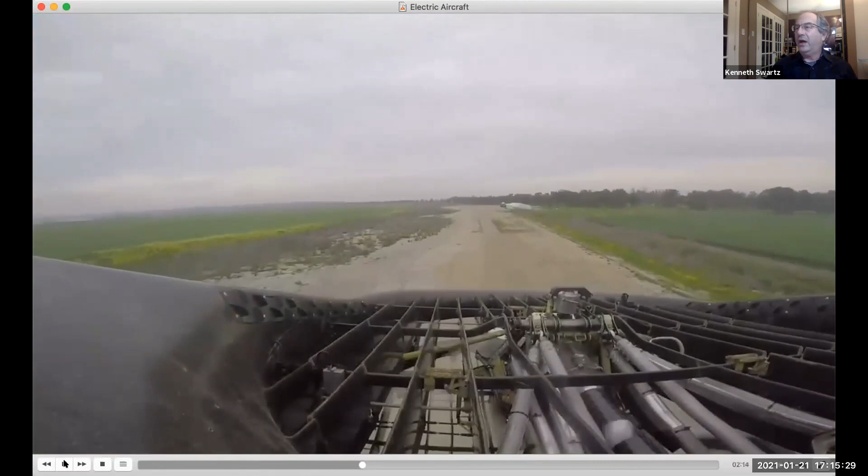Urban Aeronautics is an Israeli company. This aircraft has been flying for a number of years with an Arriel turbine engine, but they're moving to a hydrogen electric fuel cell system. It's an internally ducted aircraft.

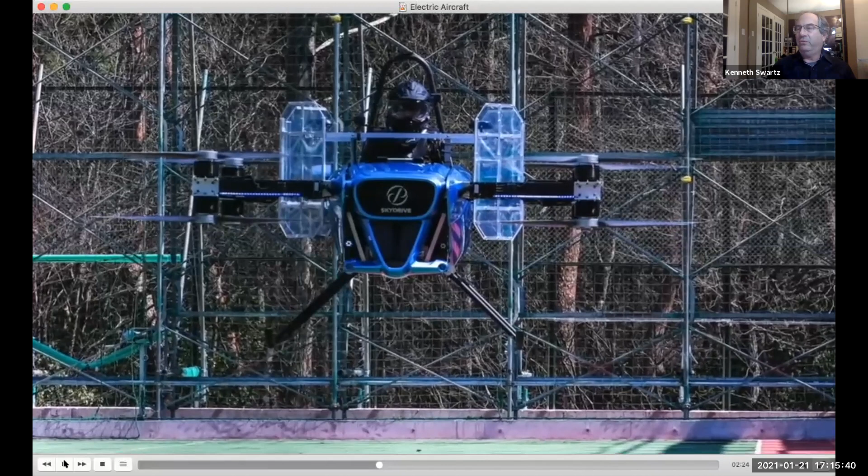SkyDrive developed this aircraft to light the Olympic torch in 2020. They will be using it in 2021. It's a multi-copter design.

Dragonair was a participant in the Go Fly prize. The $1 million prize is still standing.

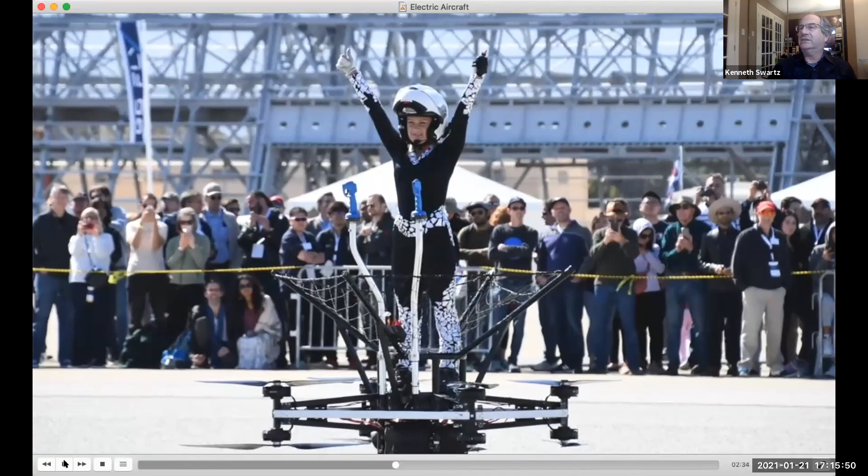Joby Aero is considered the most advanced of the eVTOL developers. This is their 2.0 aircraft, currently flying at a military base in California.

In 2009, the Green Flight Challenge was announced and sponsored by Google. The Pipistrel aircraft here won the $1.3 million prize for efficiency.

NASA has been active looking at distributed electric propulsion. The X-57 Maxwell will have a number of different wing configurations. It's currently being developed and has not yet made its first flight.

Ampaire is developing a retrofit of the Cessna 337, cutting operating costs in half by using a hybrid electric engine - an electric engine on one side, conventional engine on the other side.

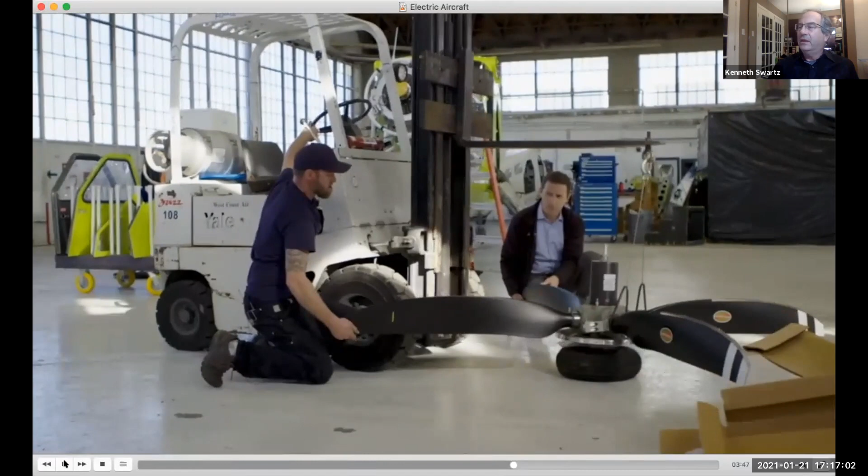magniX is originally an Australian company, now based in the Seattle area. They have a number of projects for their electric engines. One of them is a retrofit of a Harbour Air Beaver, replacing the piston engine with a 750 horsepower electric engine. This is at Vancouver Airport.

Bye Aerospace is developing a 2-seat and 4-seat aircraft. The 2-seater is a trainer. Their goal is to dramatically cut the operating costs of flight training by reducing both the maintenance and energy costs required to train per hour.

magniX and AeroTEC in Moses Lake, Washington have teamed up. Earlier in 2020, they test flew an electric powered Grand Caravan at Moses Lake. This is an STC certification program in the same way as the Beaver.

We're replacing conventional piston or turbine engines with an electric motor. The main benefits are reduced operating costs. You may lose a bit in terms of payload, but as battery chemistry improves, you'll be able to gain back that payload.

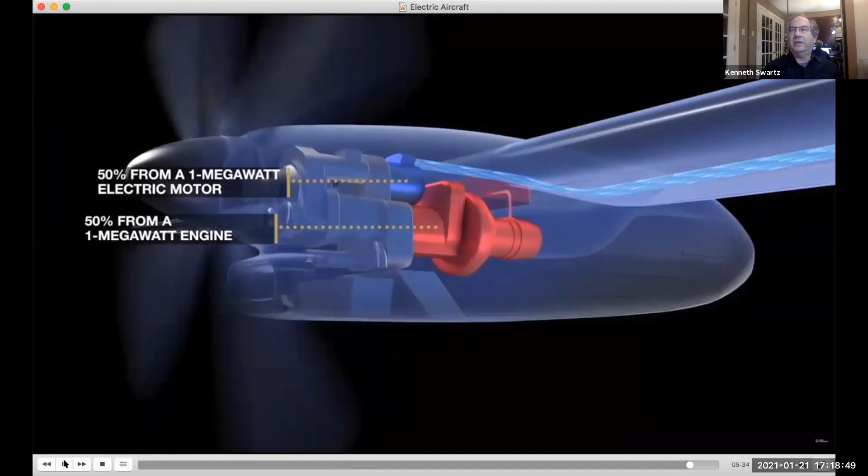The Raytheon Technologies, formerly Collins, formerly Pratt & Whitney, Project 804 was taking place at Mirabel. It's a hybrid electric conversion of a Dash 8-100.

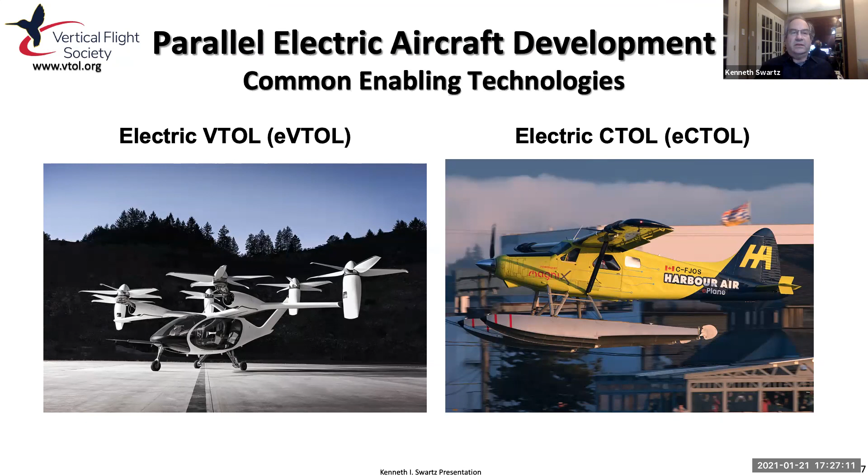So electric VTOL, why now? For many people, including myself, who've worked in the traditional aviation industry, I wasn't even aware that electric VTOL was in development until it suddenly burst on the scene. Part of it is because a lot of the activity was driven by people who were outside the traditional big OEM environment.

Coming from adjacent industries such as drones, automotive, etc. So we have advances in electric motors, advances in batteries, advances in flight controls, advances in computer modeling and simulation, and being able to do that at lower cost. We have composites, we have low-cost manufacturing, we have a movement towards performance-based regulations. So the regulatory environment is also changing, led by, for example, the rewrite of Part 23 in the US to make it easier for aircraft OEMs to develop aircraft and also to reduce the cost of certification by moving to performance-based regulations. We have other technological innovations, and then we have industry-wide disruptions, both in aerospace and automotive, that are spilling over. For example, SpaceX entering the commercial launch business, or Tesla entering the automotive business, which has served as an inspiration to tech entrepreneurs that other branches of aerospace are also accessible.

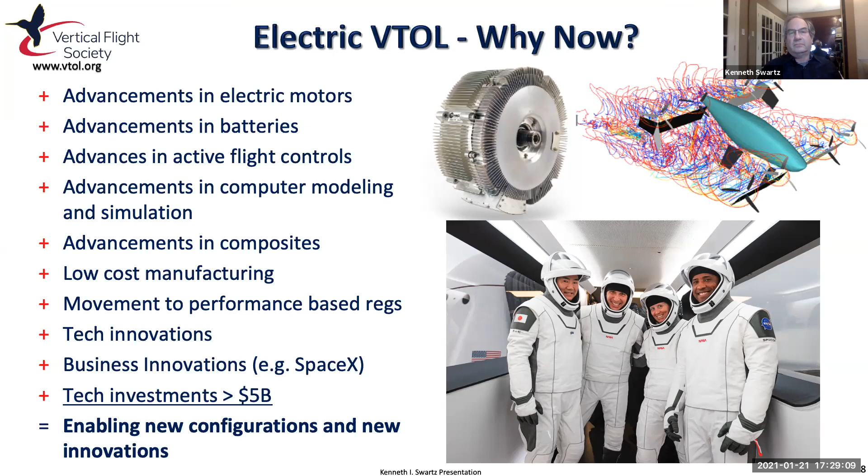You still had the powertrain, the rotor system, tail rotor system that had been developed for a reciprocating engine. So the question was, is helicopters the way to go, or is there something else that can take place?

If you look at distributed electric propulsion, where you replace a single complex system with multiple thrusters, it opens up the design space. It also makes it possible to start looking at compound VTOL aircraft designs that include both a vertical flight capability, but also the ability to fly on a wing.

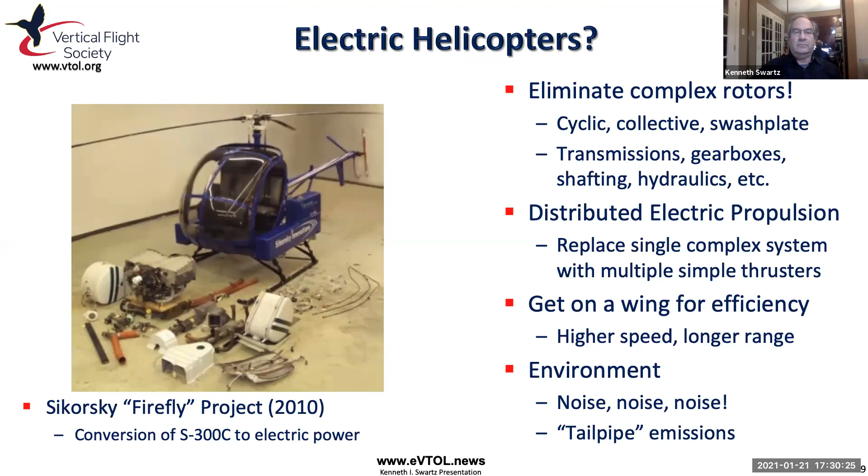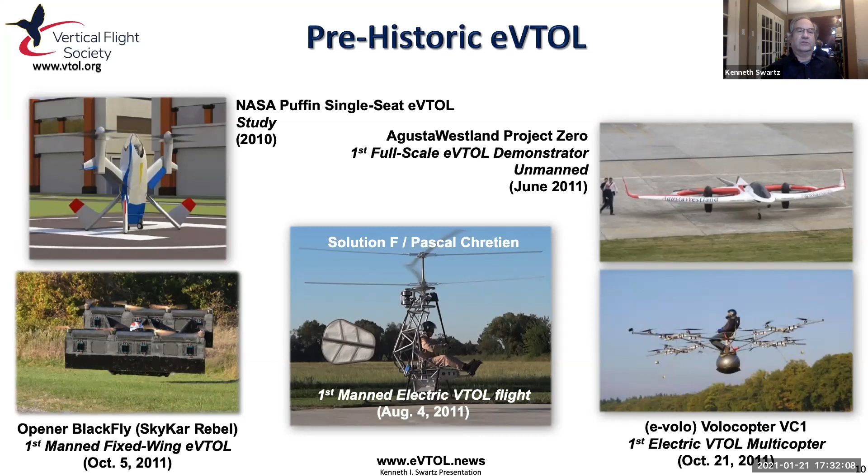So from obscurity, what we've seen take place over the last, I'd say, 3 years, is we've seen a hype cycle where suddenly there's been a lot of excitement about electric aviation and especially electric air taxis. Some people use the term flying car, but that's frowned upon because very few of these aircraft are in fact roadable, intended to be on the road.

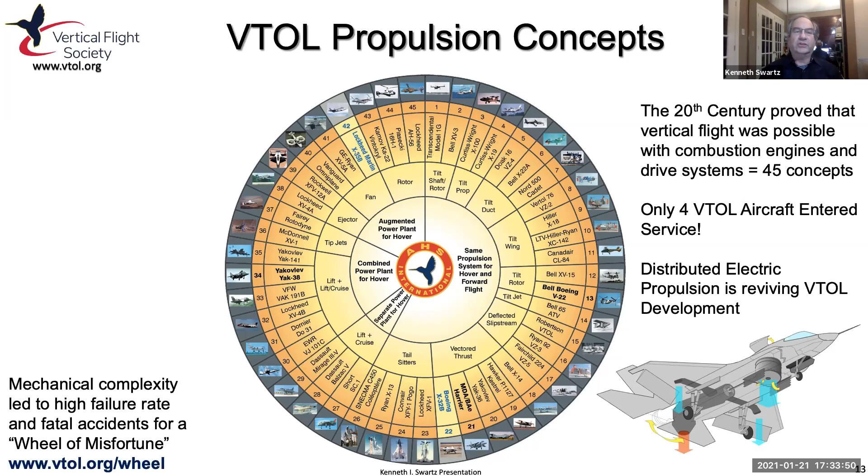One of the aircraft that was part of that VTOL initiative was the Canadair CL-84 tilt wing, developed at Cartierville north of Montreal. 3 aircraft were built and flown. It never entered production. One of the challenges was the aircraft had a complex mechanical control system, not a fly-by-wire system. And there was also cross-shafting between the 2 engines to ensure that if one engine failed, the rotors on the other would still be powered. So it was both heavy and complex, which worked against the adaptation of these kinds of designs.

As we move into the current era, that chart has been redrawn and applied to a number of the different eVTOL concepts that we see flying today, which again can be broken down and differentiated by propulsion concepts.

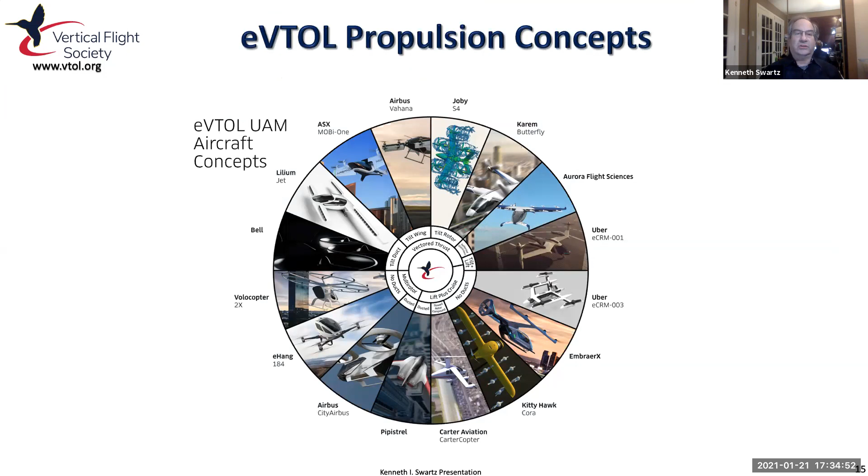Today, if we're talking electric VTOL, there's really 5 basic categories. There's vectored thrust, where the same thrusters, whether it be a duct, a rotor, or propeller, are used for lift and cruise. This would include tilt rotors and tilt wings. There's lift plus cruise, where there's independent thrusters — one set is used to take off and land, and the other set is used for forward flight.

We have wingless designs. Those are multicopters, where 100% of the lift is provided by the rotors or the thrusters. We have smaller devices, which we call hover bikes or personal flying devices. This is either akin to a motorcycle or a recreational vehicle, a single person device, often with an element of excitement and thrill. And then we have electric rotorcraft, where the aircraft have a rotor. They could, if power is lost, auto-rotate. This includes both electric helicopters and electric autogyros.

In April 2017, we decided to take the information that Vertical Flight Society knew about the electric industry and create a specialized website called evtol.news. We put up all the information that appeared in the magazines, and at that point we could only identify about 17 eVTOL aircraft programs.

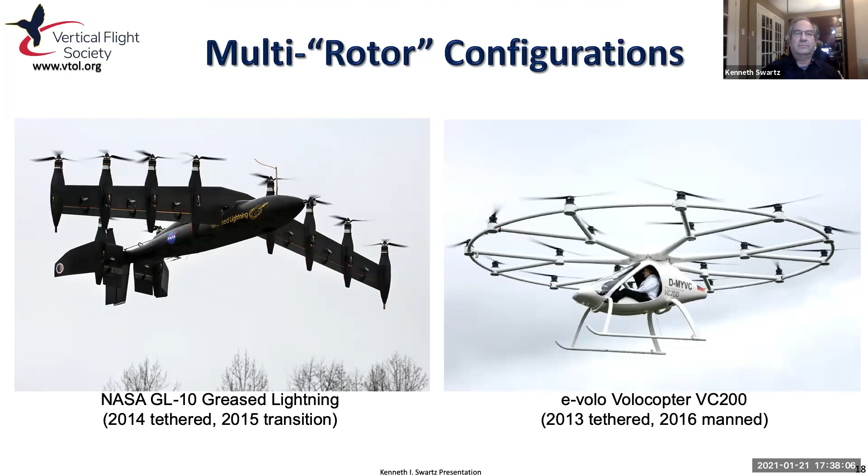As interest developed in these aircraft, so too did the question: how can we put these aircraft to work? What are they good for? How can they be used?

What we see is a progression from the light end of the marketplace up into urban air mobility and regional air mobility. The interesting thing about this sector is that very few people are proposing anything that can carry more than 6 passengers, and there's a couple reasons for that. One is limitations related to battery chemistry and energy density of cells currently available.

The other consideration is that aircraft noise typically scales with takeoff weight. If you're trying to develop an ecologically friendly aircraft, the feeling is it's lower risk and lower cost to develop from the bottom end and work your way up. But there are no eVTOLs proposed with maybe more than 6 or 7 seat capacity, and the majority are in the 4 to 5 seat capacity.

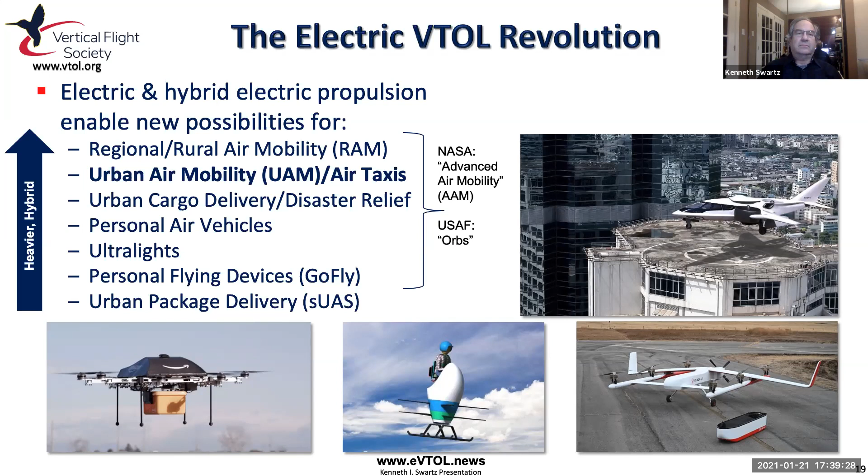eVTOL ultralights are one of the first categories of aircraft that caught popular attention.

In the last 3 years, we had Kitty Hawk come out of stealth mode, we had Opener come out of stealth mode, Lift, Hover Surf. The US rules under Part 103 ultralight category: if the aircraft is under 254 pounds, it does not have to be certified or registered, and you do not have to hold a pilot's license. It falls in the same category as a paragliding device or even an ultralight trike.

The FAA also grants an allowance of 30 pounds per float for amphibious, waterborne aircraft, plus it grants an exemption for parachutes. So you can exceed that 254 pound limit.

Opener and Kitty Hawk both made over 20,000 flights with their aircraft. Kitty Hawk shut down their Flyer program earlier this year, but Opener and Lift particularly are continuing their aircraft development.

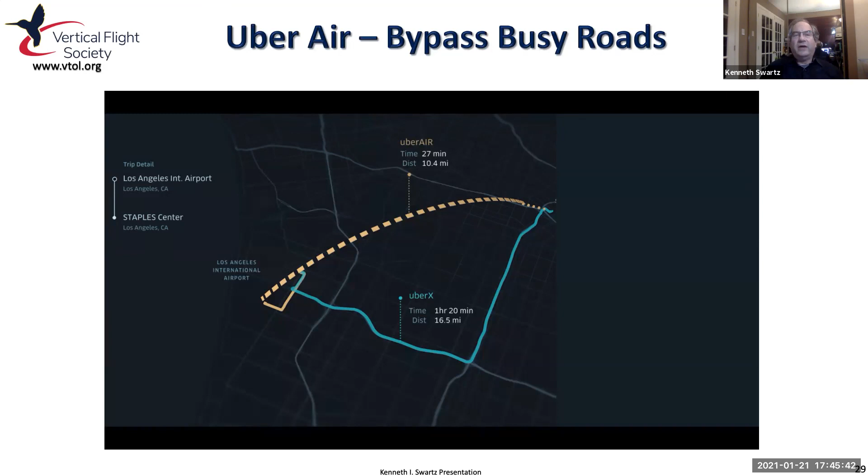What they had was the big data of urban traffic flows, time of day, day of week, seasonality, and they could also correlate that with income. With that data, they could understand, through big data analysis, what the traffic flows were for all the cities in which they had a market presence. Because these aircraft would only carry 4 passengers, like a typical taxi or shared vehicle, and have a single pilot, in order to scale this you would also have to scale the ground infrastructure.

Uber spoke of skyports or vertiports designed for high capacity operations, as well as transferring passengers from the rooftop to the ground to an Uber vehicle. The concept was to identify nodes within an urban environment that would be the ideal connecting points between ground and air, or even on foot. This unleashed a lot of creativity among architects around the world in terms of what these vertiports might look like.

From Uber's perspective, they argued very strongly that an eVTOL aircraft must have wings. They were looking at two things: the battery power required to cruise, and the battery power required to hover. If you can achieve wing-borne flight, you can reduce the amount of energy required, especially important if you only have finite energy. The second element is that wing-borne flight lets you fly faster than a helicopter, achieve higher productivity, generate more available seat miles per year, and have a distinct advantage over a helicopter, ultimately driving the cost of operations down so it's not such a big step to move from an Uber Black into an eVTOL.

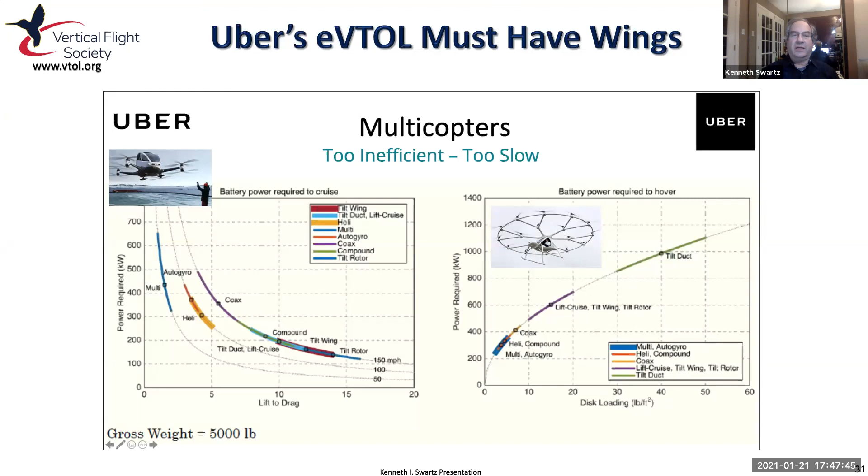So what they were trying to achieve was seat mile costs close to that of a ground taxi. They also looked at the technical aspects of disc loading and power loading, and they lined up 10 partners, 8 of which were announced, companies that would be developing aircraft for their ecosystem.

In the meantime, there were other companies developing their own aircraft. Kitty Hawk grew out of Zee.Aero, a California company.

The Cora project that Kitty Hawk was developing was spun off into Wisk, which is a joint venture between Kitty Hawk and Boeing. This is a 2-seat eVTOL aircraft that is currently being flight tested in New Zealand and California.

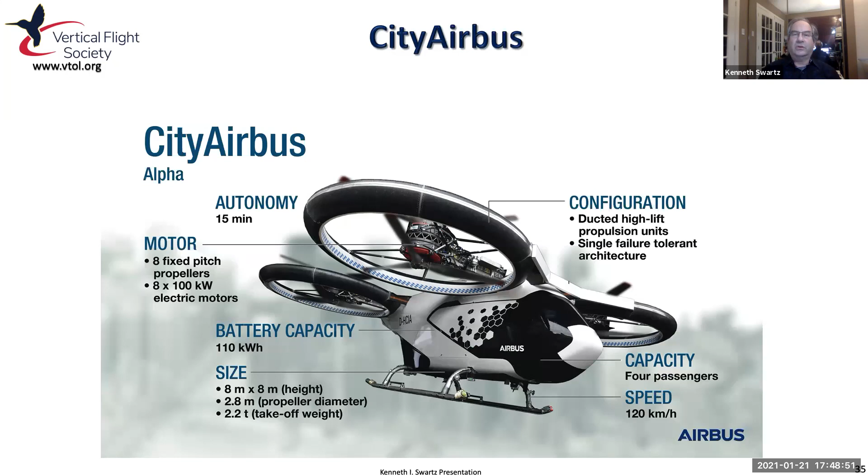City Airbus is a project of Airbus Helicopters that complemented the Vahana project being undertaken in the States. This aircraft is being flown in Germany, and it has 8 fixed pitch propellers, and it's also a technology demonstrator to learn from.

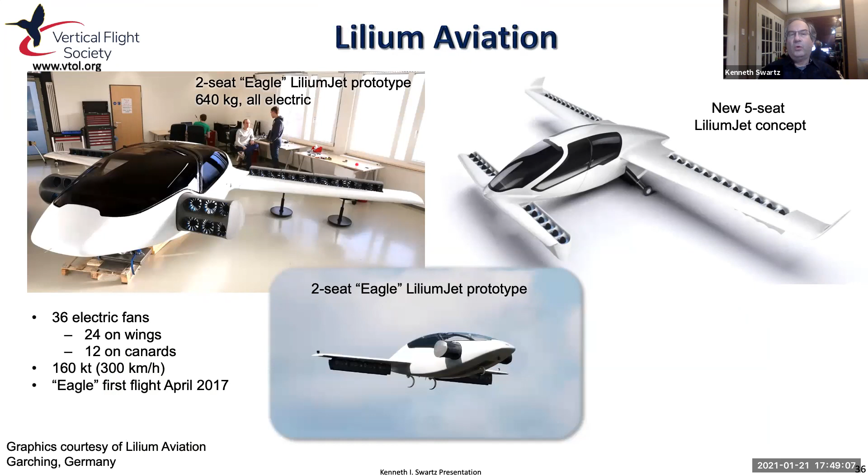Lilium is another German program. They use small ducted fans, 36 on the aircraft, and the concept is a longer range, higher speed aircraft. Recently, they announced that they were going to set up a commuter operation in Florida.

EHang in China has actually started producing their aircraft. They seem to be operating within an exemption to traditional aircraft certification, but they are developing this aircraft in China. They have Western investors, including United Therapeutics, and they've done demo flights of this aircraft in many parts of the world, including Quebec

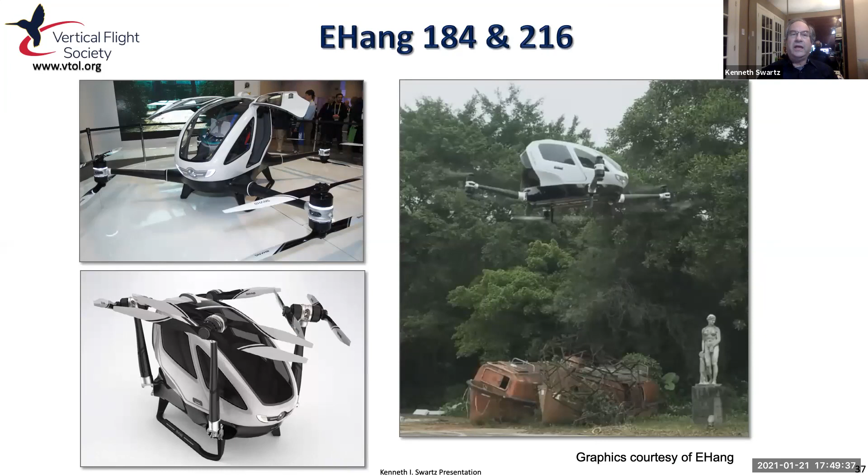and Bromont. In January 2020, there were a number of unveilings. CES, the show in Las Vegas, became more of a hub for this activity than the traditional aviation shows. Bell unveiled a 4-ducted Nexus for the Uber program that would be all battery electric, to complement a hybrid electric aircraft they unveiled in a previous year.

Joby Aviation, after 5 years of being in stealth mode, unveiled their eVTOL aircraft, what was originally known as the S4, and now they call the 2.0, which is a 6-rotor tilt rotor with 5 seats. They announced this program in conjunction with new investments, including $400 million from Toyota, bringing their investments to over $720 million and placing the valuation of the company at over $1 billion. And Hyundai announced a $1.5 billion commitment to develop eVTOL aircraft.

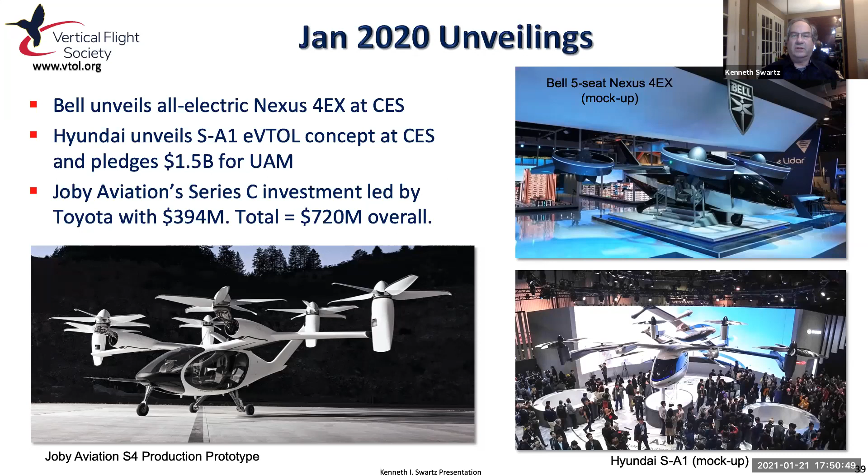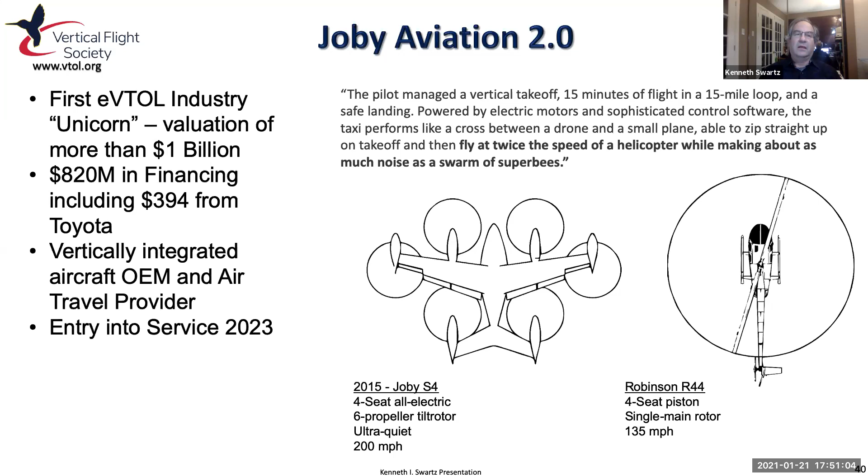Joby last gave a technical presentation in 2015 at a VFS event, when they revealed the concept of the S4. Nothing was heard or revealed about this aircraft for a period of 5 years. Recent patent filings reveal a lot, and here's the aircraft in its various modes.

Over in Germany, we've had Volocopter partner with both transportation organizations, but also first aid organizations such as the German Automobile Club that runs air ambulance programs, and they're doing a demo program. They've released a white paper on eVTOL aircraft in emergency response.

United Therapeutics is a company founded by Martine Rothblatt, founder of Sirius Satellite Radio, a billionaire, looking at funding a number of different eVTOL programs to support the transportation of human organs for transplant that have a very limited shelf life. They're funding a number of different electric helicopter and eVTOL aircraft programs, including EHang,

Beta Technologies in Burlington, Vermont, Tier 1 Engineering in California with the Robinson, and I believe Piasecki Aerospace in Philadelphia.

Jaunt Air Mobility is another concept. They bought the license to the Carter Copter slowed rotor system. This is a heavily weighted rotor on really a gyrodyne design, where as it increases cruise speed, it achieves primarily wing-borne lift, and the rotor is slowed to reduce drag.

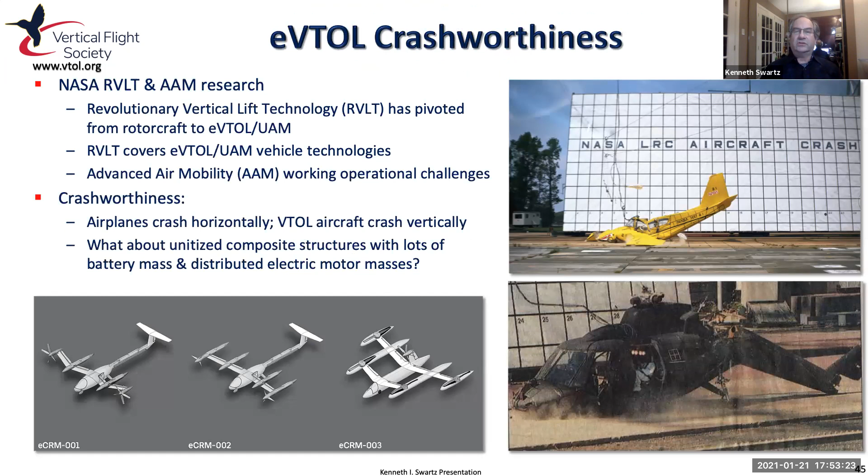Similarly, Airbus is looking at an electric system to provide emergency power in the event of an engine failure, where a battery would allow the aircraft to safely auto-rotate.

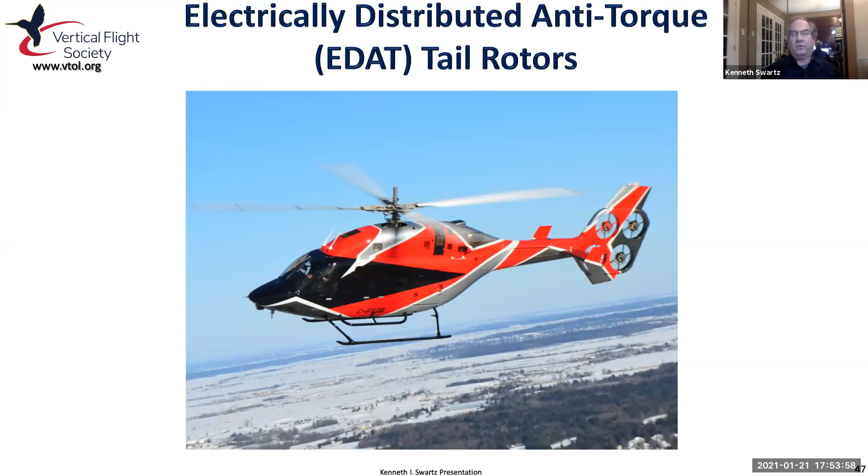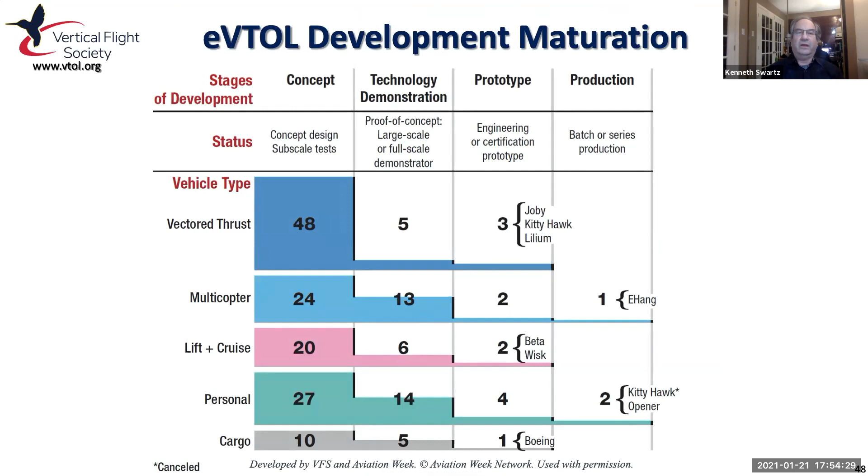The latest development is that Uber has pivoted away from eVTOL development as a champion. This reflects the impact of COVID-19 this last year, where their food delivery services are actually much greater than their ride-sharing revenues.

And we're probably all guilty of contributing to that if we've been self-isolating and ordering takeout, to the point where their mobility revenue is 53% of what it was year over year, while the delivery revenue increased by 125%. As a consequence, Uber has been selling its...

longer lead time technology projects. Their self-driving car unit was sold, and they invested $400 million in the startup. Similarly, last week or two weeks ago, the sale of Uber Elevate to Joby closed, and Uber has invested $125 million in Joby, representing 15% of investment. Okay, eVTOL, I realize we're running tight on time.

So what are the challenges? Technology, infrastructure, flying. There was a pilot shortage prior to the coronavirus pandemic. It's expected that these eVTOL aircraft will enter commercial service in 2023, but more likely 2025. We can be in a situation where a lot of people have left the commercial aviation industry, and we'll have a pilot shortage again across all sectors. So the question is, where are these eVTOL pilots to come from, and how can you structure a rewarding career path? Standards and regulations are in development, haven't been completely finalized in the US or Europe, although there's great effort to seek harmonization as well as to use standards to support these things. Public acceptance, noise, and safety are also very front and center.

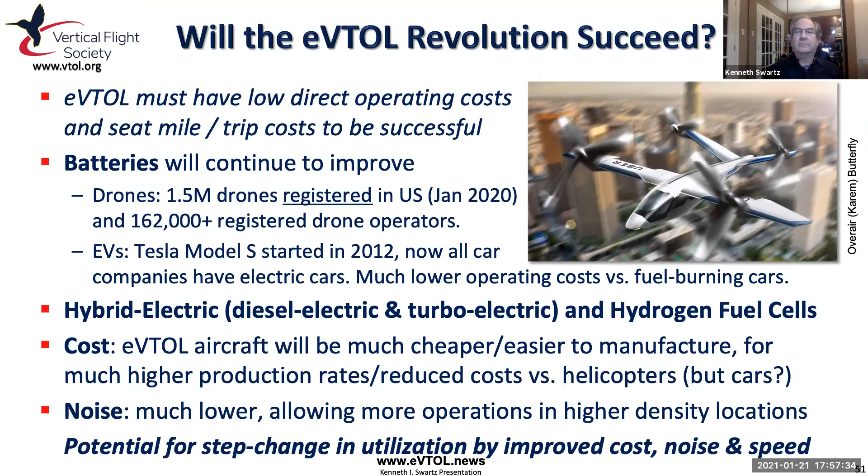The commercial path - really there are three players that have to make money: the manufacturers, the operators, and the service providers, if, for example, it's a contract operator like an Uber. If we look to Canada, Canada is home to the world's most successful scheduled helicopter operator, between Vancouver, Victoria, and Nanaimo. Helijet, which has been flying the route for 34 years, is looking at eVTOL to feed their trunk operations at low cost and low noise, both in Vancouver and Seattle.

Okay, the other thing that's spooled up as Uber's involvement has spooled down is the US Air Force becoming a major investor in the acceleration of this technology. They want to not create separate requirements, but support the commercial development and certification of these aircraft and become a major customer. As a consequence, they have an Air Race to Certification program. Joby is part of it. Beta Technologies in Burlington, Vermont, and Plattsburgh is part of it. And it's moving forward.

Okay, I'm looking at the time and it's, I guess, 5:58. I will continue to speak for a few minutes to rush through the fixed wing section of this program.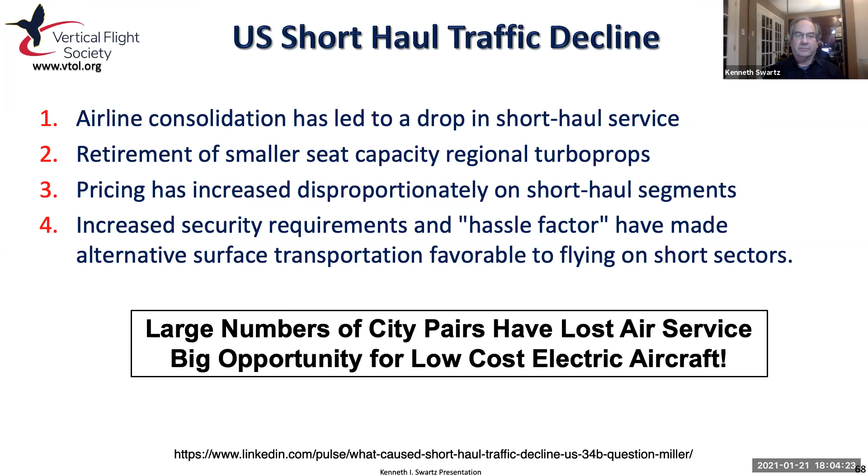So what are the projects that are out there? This is by no means a comprehensive list, but Ampaire is developing the hybrid electric Cessna Skymaster. They replace one of the engines with an electric engine, and the other is an engine plus a generator to power batteries. They effectively reduce fuel costs and maintenance costs in half, and some of their customers are flying small routes, Caribbean and Hawaii, between islands, where that kind of savings is substantial.

MagniX, originally an Australian company, now headquartered in Everett, Washington, is looking at the Cessna Caravan for the same thing—short haul routes where they can significantly reduce the operating costs of the aircraft, operating a PT-6.

Harbour Air has announced a commitment to go all electric. The political climate in British Columbia is supporting zero emissions or low reduction in emissions. Maintenance costs for the Pratt & Whitney R985 are quite high—this is an engine that was designed in the 1920s.

The battery weight may mean that you lose a seat or two relative to the piston variant, but with operating costs less, you could still make money, and then gain back the payload as battery efficiency improves.

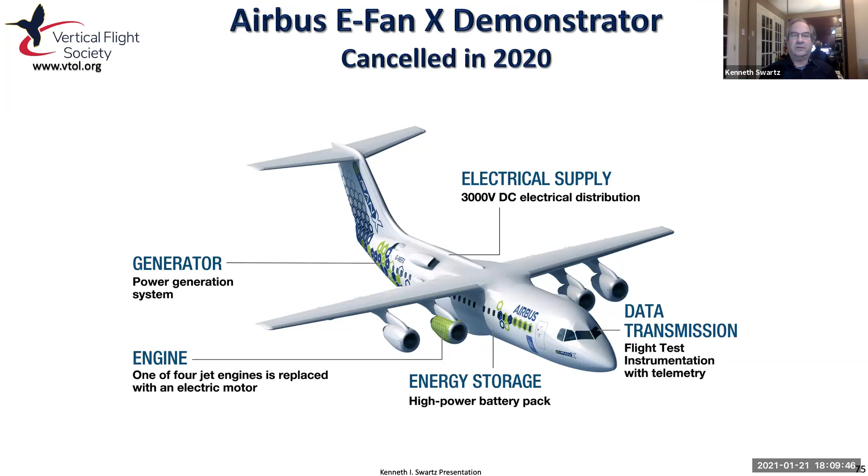Airbus did the E-Fan demonstration project with a single-seat aircraft flying across the English Channel about 6 years ago. They scaled it up and decided to leapfrog some of the competition by developing the E-Fan X demonstrator, with one of the engines converted to electric power to learn as much as they could about this, converting an RJ-100 regional aircraft. This project was canceled in 2020 while the aircraft was being converted, I think largely because of COVID.

Probably the newest development to appear on the scene, I'd say in the last 18 months, is the realization that if you have distributed electric propulsion and place a number of motors on the leading edge of the wing, you can create a very high lift wing and develop a short takeoff and landing aircraft that's electric powered. If you can achieve attractive performance on those aircraft, you can actually operate out of non-traditional locations, such as parking lots, STOL ports, the roof of large warehouses and distribution complexes.

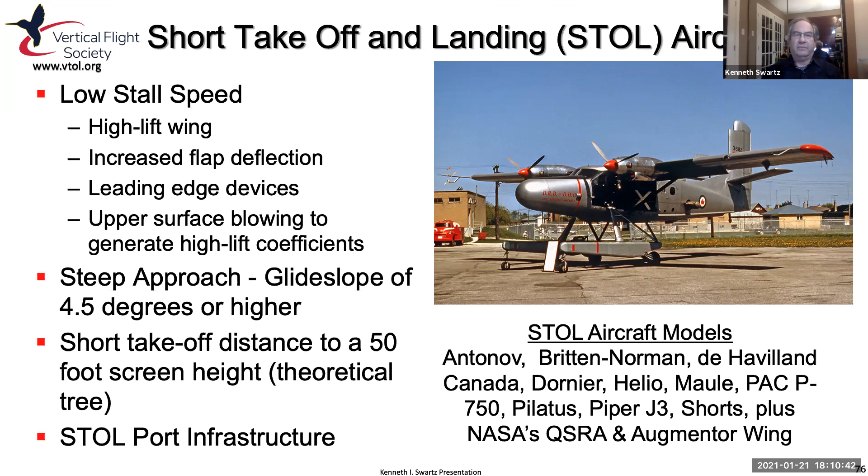So there are a number of companies developing eSTOL aircraft. One of them is Airflow in California, which includes a number of Airbus and Vahana people who are developing this STOL aircraft. It's, I think, a 3 or 4 passenger, maybe a 500-pound or under 1,000-pound payload aircraft. They envision that this aircraft could take off and land in a site equivalent to, say, 3 large heliport pads.

Similarly, Electra Aviation was formed by John Langford, who sold Aurora Flight Sciences to Boeing a couple of years ago. When he sold Aurora to Boeing, he decided to keep the intellectual property and the work he'd done on STOL aircraft. So Electra is developing a hybrid electric STOL aircraft.

When we talk about hybrid electric, there are really 2 forms. Some people are looking to diesel engines, which consume less fuel than a traditional piston aircraft and are relatively inexpensive, as a source of power for these hybrid electric aircraft. Other people are considering a turbine engine driving a generator that would power the electric engines. In both cases, they have the ability to use jet fuel, or Jet A, as opposed to avgas, which is becoming more and more in short supply.

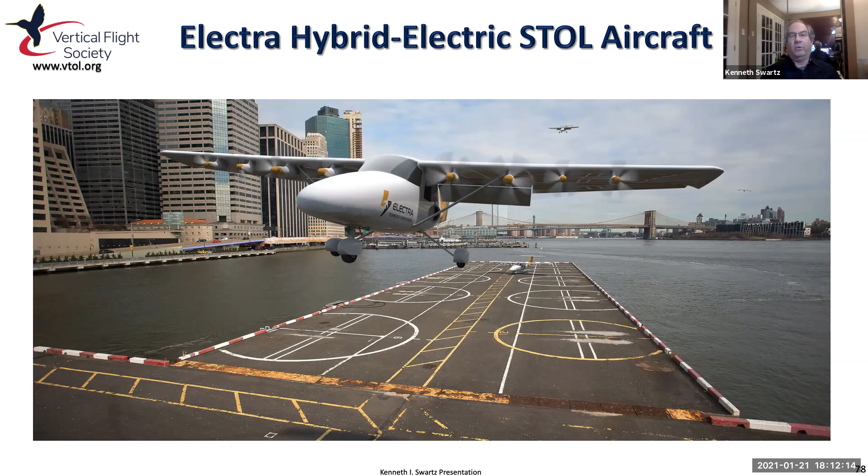In the last 18 months or so, suddenly hydrogen fuel cells have started to be considered for aviation use. ZeroAvia has flown hydrogen fuel cell powered Piper aircraft in the US and UK, and they intend to convert a Dornier 228 19-seat commuter aircraft into a hydrogen fuel cell powered aircraft. Essentially what happens is that the fuel cell liberates an electron, which is used to power the aircraft.

In recognition that hydrogen is becoming much more discussed in eVTOL circles, I believe it was last week that the Vertical Flight Society held the first meeting of its Hydrogen Council, with the intent of working together across the industry to advance the use of fuel cells.

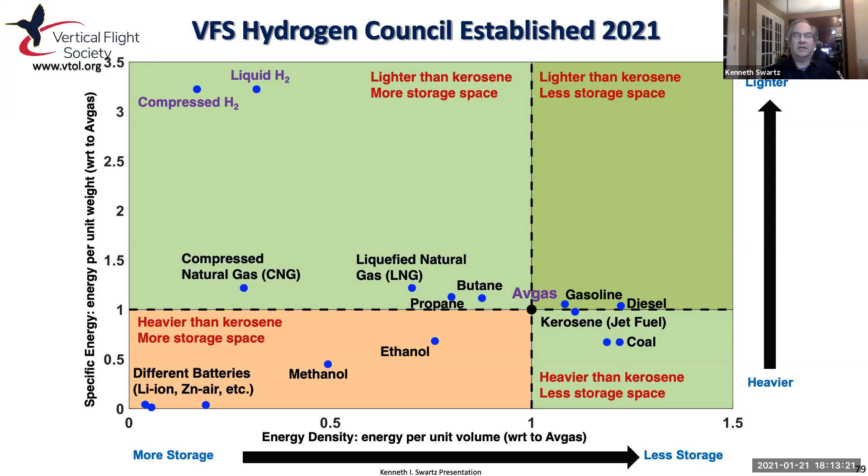Okay, so in conclusion, wearing my Vertical Flight Society board hat, VFS has a tremendous amount of free resources available for anyone interested in this field. We have eVTOL news and we have the website. We are very active on social media. I was involved in initiating the videotaping of our speakers about 3 years ago, and we now have over about 200 hours of video available online on electric aviation, both fixed wing and VTOL.

For the last 3 years, we've also partnered with the CAFE Foundation, which holds the annual Electric Aircraft Symposium. They held the first electric aircraft symposium back in 2006. We've worked very closely with them, recognizing that when you have a VTOL aircraft that has a wing, it's important to follow what the whole industry is doing, and it's breaking down the traditional silos that might exist.

We're very similar to CASI in that we have a number of different technical committees. The eVTOL committee was added a year ago. Uniquely, VFS also has a history committee. These are people who are in industry but are interested in the history of technology, in some cases for its reapplication today, but also to track the activities of the pioneers.